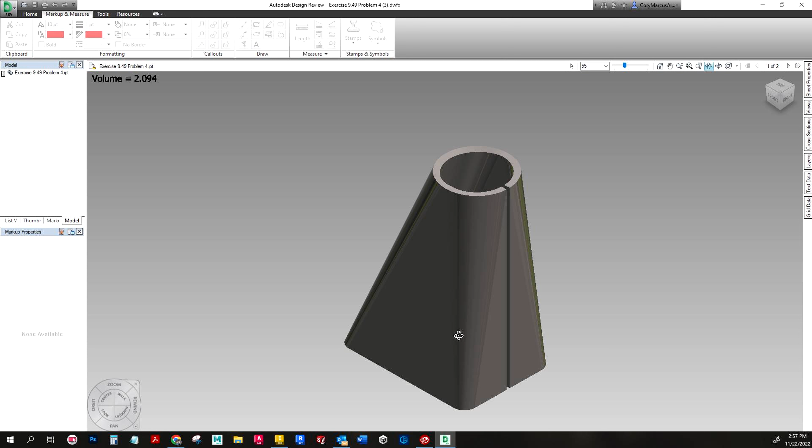I've got a PDF of it attached here in a DWF, so this will be what we're drawing today. And if I go to design review, I have a nice little model of it, with the volume too, so you can check what is correct. If you're navigating around, you may notice it's actually moving in place. Just go back to the ISO view and you should be able to see it perfect. So yeah, this is what we're going for.

I'll explain how to do it step by step, but just a general overview. We're starting the sketch on the top face. From there, I'll show you how to do it by offsetting a plane from the origin plane, the top plane, giving it a specified value, and drawing a sketch on that plane. Essentially, it's the square end and the circular end. Doing the lofted flange command to then create the shape. After that, it just needs a rip in order to be able to unfold, and then you can create the flat pattern.

Okay, so let's dig in. Now, in this case, this part is not a sheet metal part yet, so I need to convert it to sheet metal.

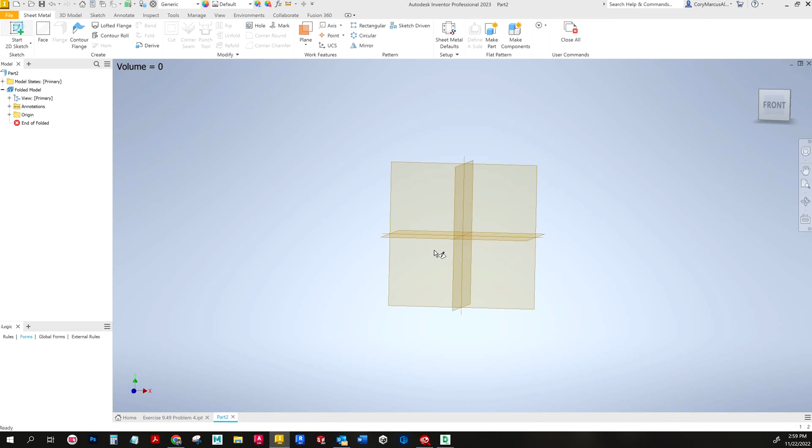From there, I'm just going to sketch on the top face origin plane. I'm going to move this out of the way so I can actually see it. Same with this guy. Okay.

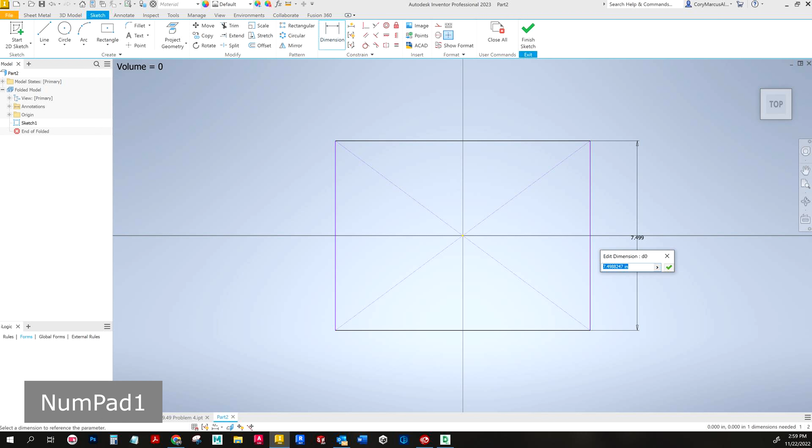You could choose to draw this wherever you wanted. I'm actually going to do a center for the bottom, so when I'm doing planes, they'll bisect this part, not the other one. You could finagle it into place if you wanted to have the other one, but that would be a lot more work.

All right, so I've got my overall shape of 1.74 by 2.5. I can finish the sketch. I'll do an offset from plane.

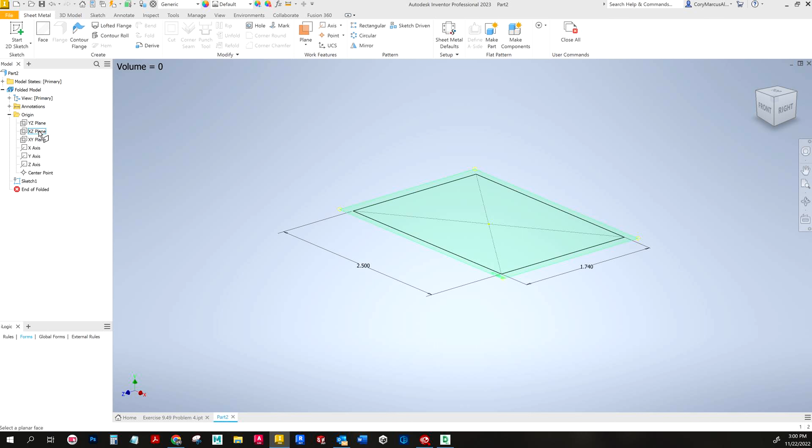And the height is 3.5. All right, so I'm going to draw a sketch on that same plane, rotate it so that it's showing top correctly. And let's see.

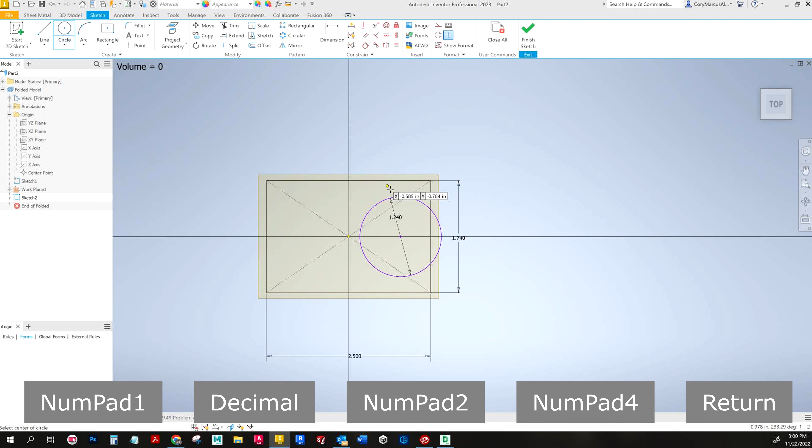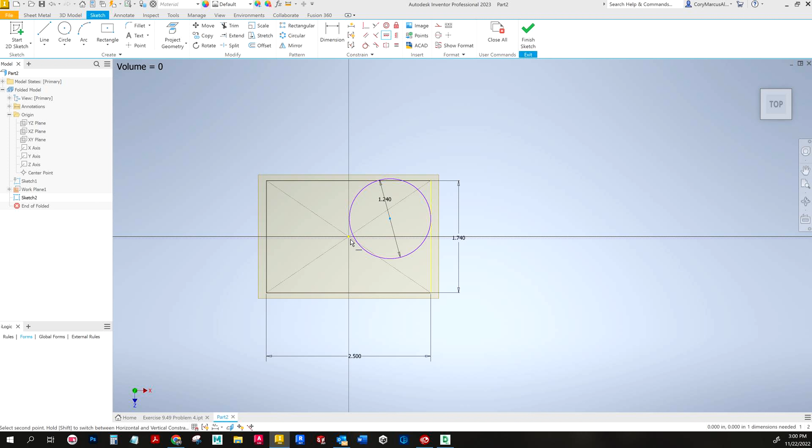The circle is 1.24 in diameter, and it's tangent to this other sketch. So if you notice, I do tangent, but I can't actually do anything about projecting that edge, so I have to do project geometry first. Then I can apply the tangent, and then all we'll need to do is locate the circle vertically, so I'll do a horizontal constraint between the origin and the center point of the circle.

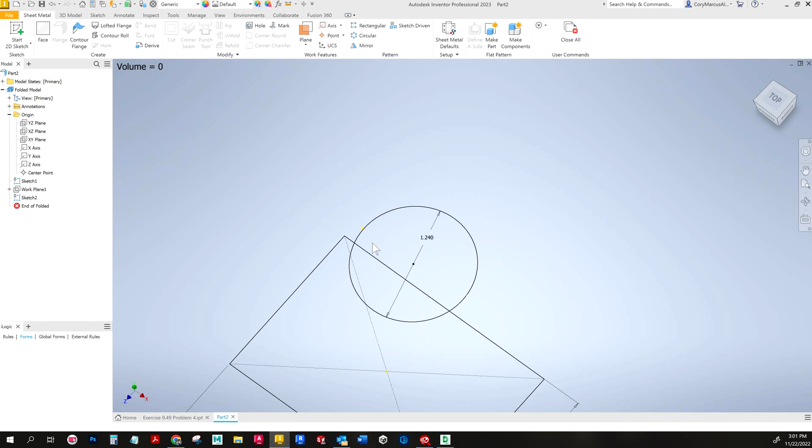I'll finish sketch and turn off the visibility of that work plane. And you know what, I'm going to go back and select this yellow line and change that to construction. That way it's not so apparent and it doesn't grab it when I'm using other features.

So from here, you could create this two different ways, but the problem is you can't use the rip command if you don't use the sheet metal options in this case. Sometimes you can do a regular flange and shell it, and it'll allow you to do what you need, but for this part it doesn't - the round contour, I guess, gives it problems. So we will do a lofted flange.

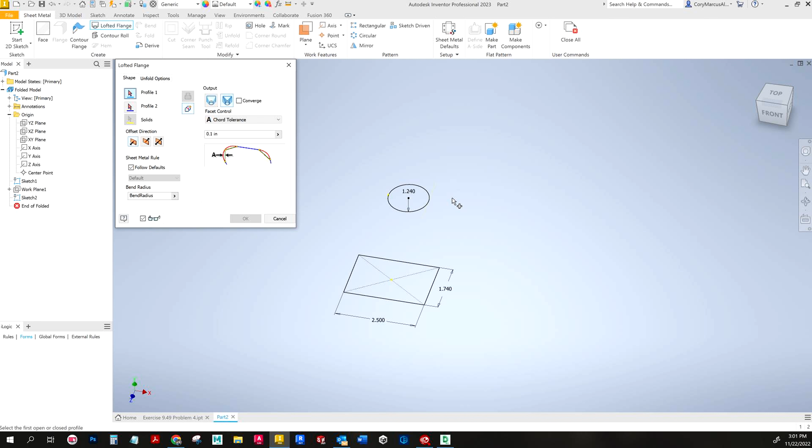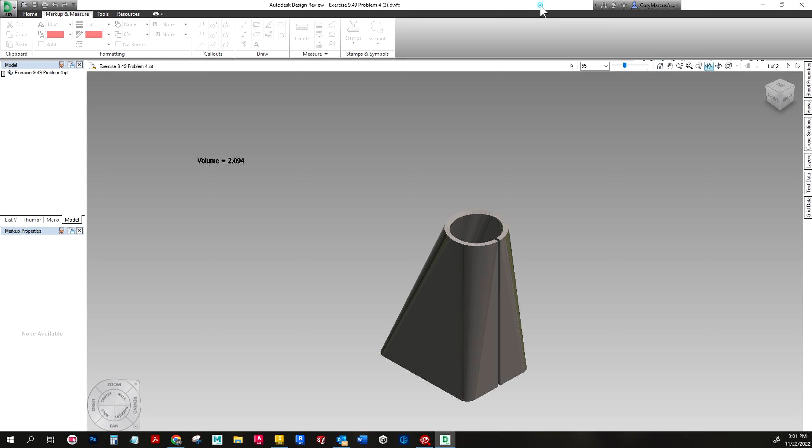And before I do that, actually, I forgot to set my sheet metal defaults. So this one is based out of the book, so let's take a look. In the original book, it's just a regular part, obviously, but in order to have this general shape, the settings we'll use is 0.1046. Set this to steel mild.

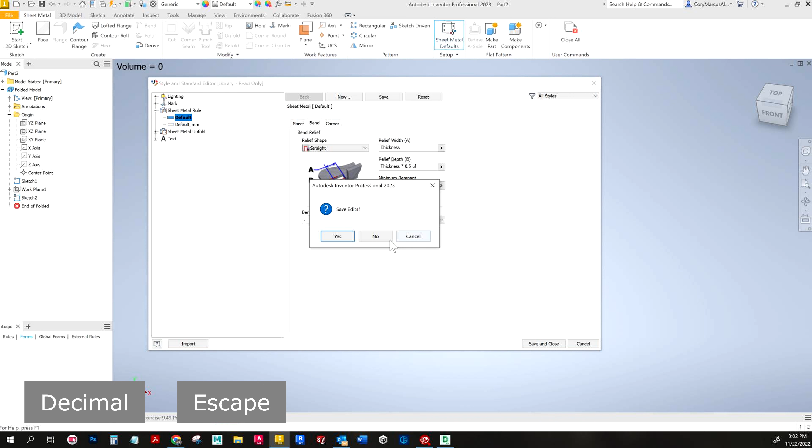And then the bend radius is also 0.1046. I'm going to leave it actually as is. So bend will leave its thickness. K factor I know is already set to 0.44, so we'll just change that miter / rip / seam gap to 0.0625.

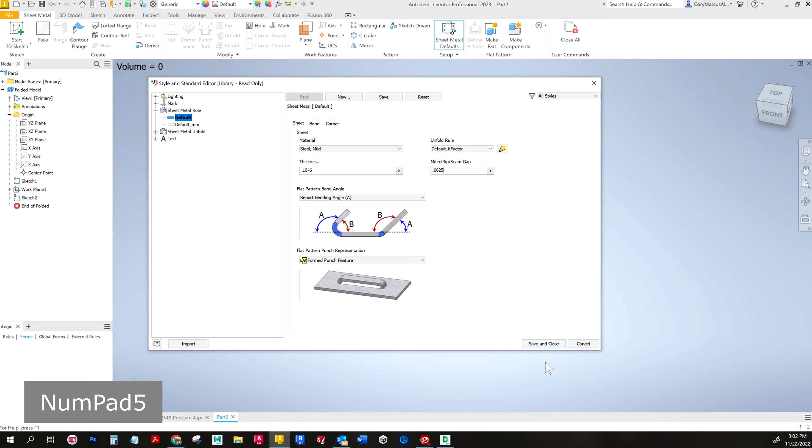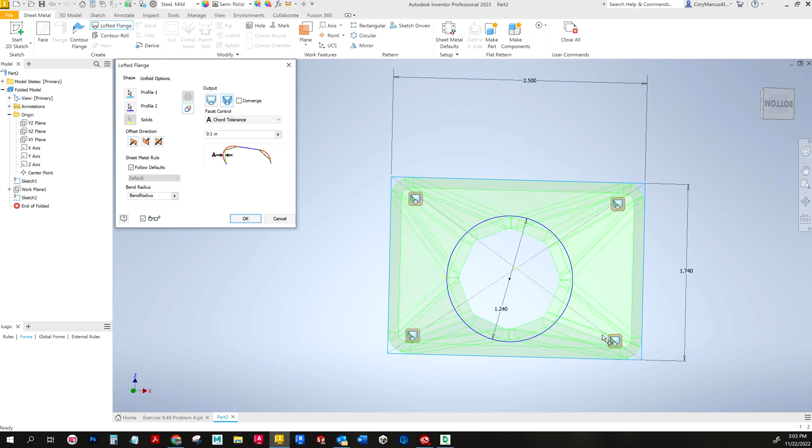And now we will choose 2 profiles. And so here's a part to observe. If you look closely at the profile, it extends outside of it. You can kind of tell if you look upside down a little better. So I'm going to flip the direction so it matches the extents of the outside. And it does the same up here. You can kind of notice, so it's a little crazy looking.

If I were to hit apply, it would make this wild shape, and it has all these little folds. It looks a little crazy on the ends usually. It's not too bad in this case. Okay, so down here you see like a little deformation. And this is part of when you do it like that.

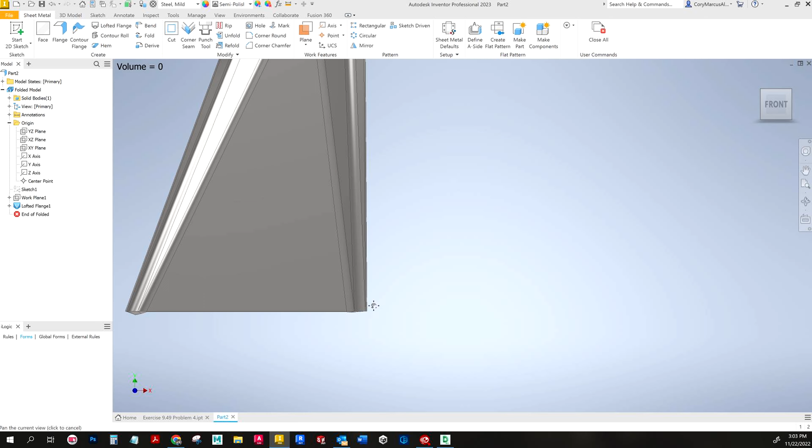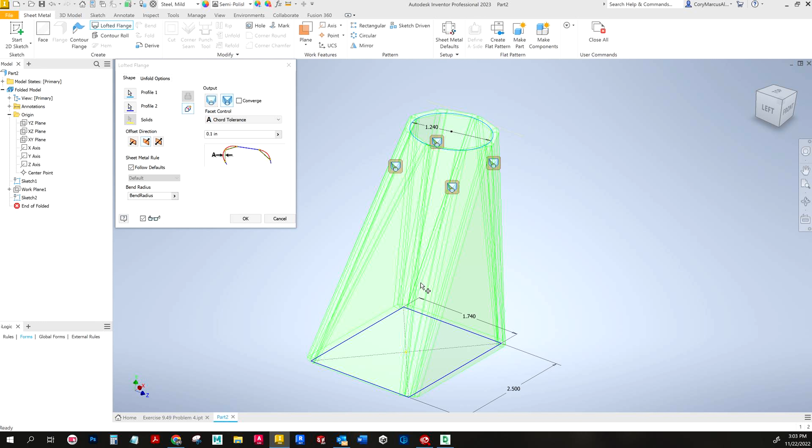Honestly, depending on where you're doing sheet metal stuff, this may be how it comes out, because there's 2 embedded options in how it's made. And I can only actually show you by deleting the feature and re-adding it, which is kind of lame. So I'm going to do that. Okay, so there's 2 different design choices. If you look over here at output, you have die formed and press brake.

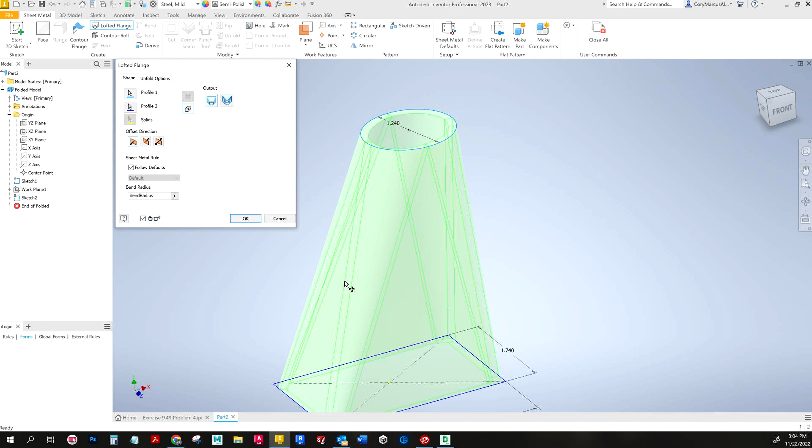So press brake is whenever you intend to more or less fold this incrementally, because all you can do is make folds. Whereas die formed, you can do a lot more. As you can see, the bends are less visible. If I click between the 2, you can see there's less edges. So we've got it in the maximum extent there, and I'll hit apply.

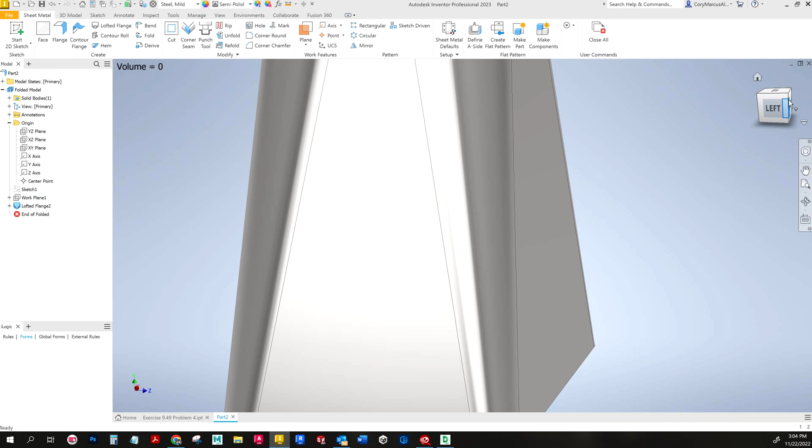So typically for most of these that I do, it'll be that die formed option, but you can see it comes out much smoother, and it has very, very perfect, lovely edges. It still has the deformation down here, but it's actually a smaller footprint. And then, the last thing to do essentially is to add a rip so we can unfold this.

So I'll do a sketch on the bottom. Whoops, bad click. When you're looking at the easiest place to make a rip, it really varies. But I know from experience, if you do it from the top, it is hard to make it work. And how do you decide that? Well, that's a good question.

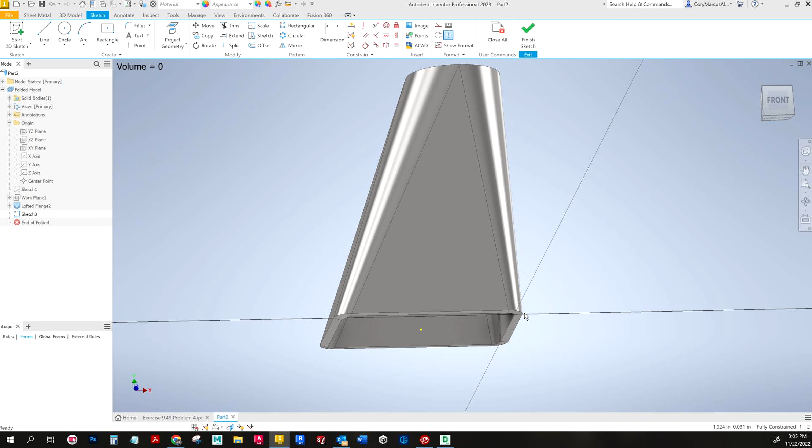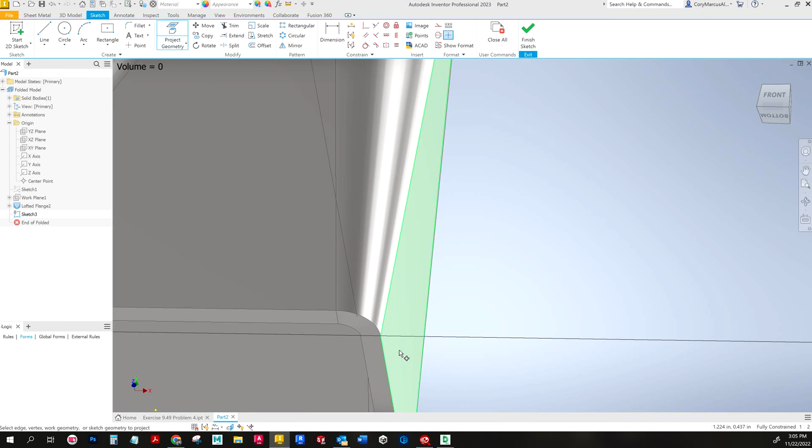So with an area like this, it's very flat. This sketch on the bottom face is going to be perpendicular to the rest of the part. If I did it up here, you've got a little curvature going on, if you can see. So that makes it a bad candidate. So we want somewhere that has a true orthographic style or position within your geometry. So for this one, let's go with the shorter side here.

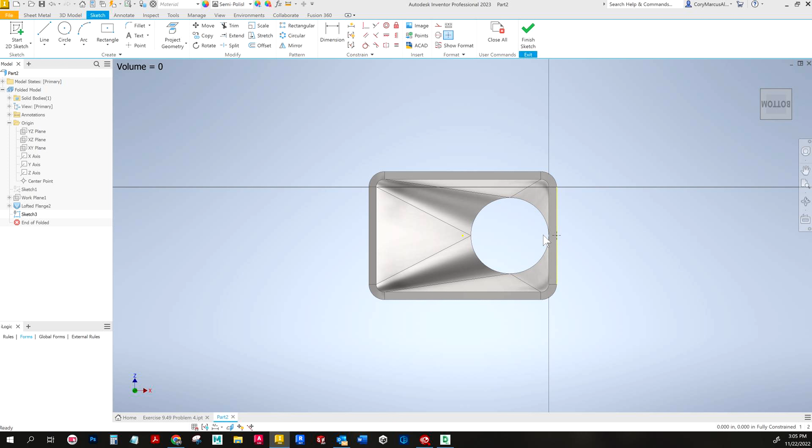I'm kind of moving it in a weird position so you can see what I'm actually doing here, but I'm going to draw a point. And do a horizontal constraint with that point to what is actually the center. It's a weird position for the dot, but that is the center of where we're at. Then I can just do a rip command, choose the outside face, and that point, they overlap, so it projects as cut through. And I can hit OK.

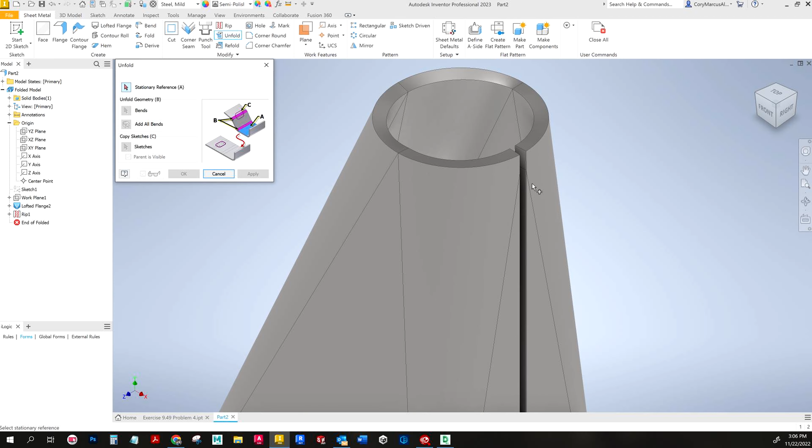So after that, you can unfold it. Again, there's a couple ways to go about that. I don't know why I actually clicked it. You can use the unfold and refold commands, but I always just say, unless you have to, don't bother. It used to be back in the day, you could unfold it, do some manual cuts on it, and refold it. But for what we're doing, just click create a flat pattern, and there's a flat pattern. Easy peasy. So that's going to be it.